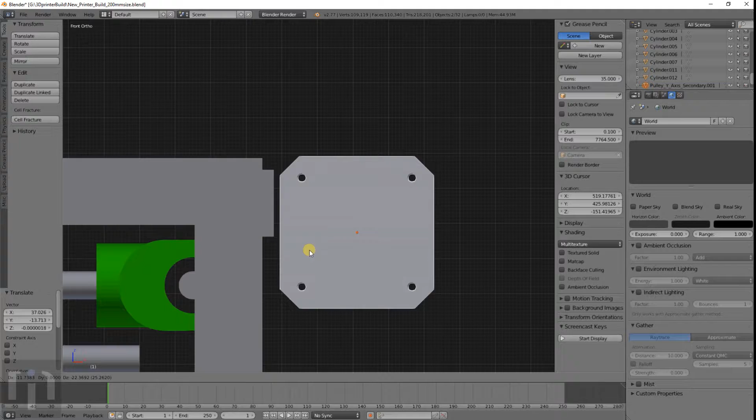So this one's going to be up here, kind of. Kind of make it even with this. Duplicate that. Just make it in line with this. Have this up a little bit.

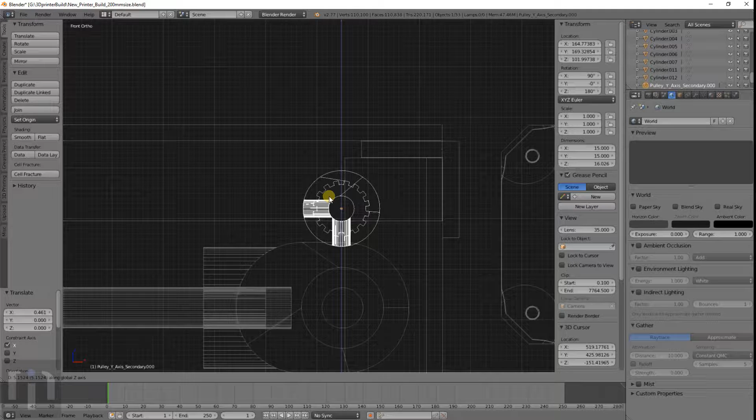Focus in on that. We want to have that have clearance for the belt and everything. And we actually want to have two of those, so I want to duplicate that.

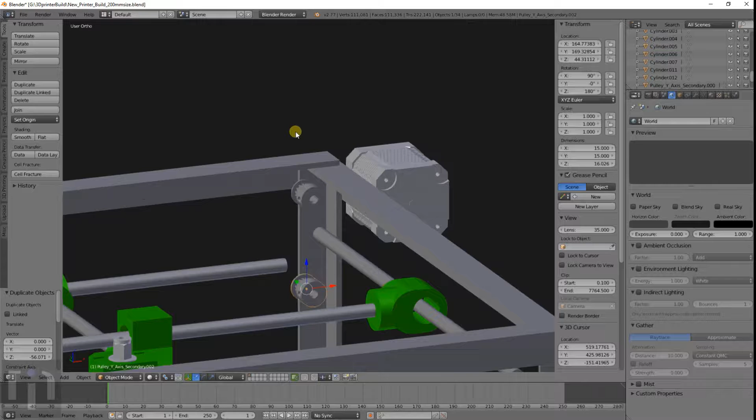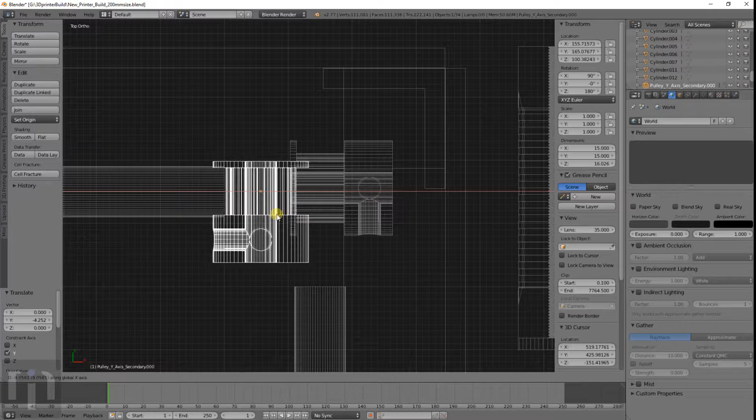Rotate Z. That'd probably be good there. Just move it out a little bit. So that it's kind of centered with that. Go ahead, make that there. That way it's lined up just right. I'll make this one centered with that one too. That looks good.

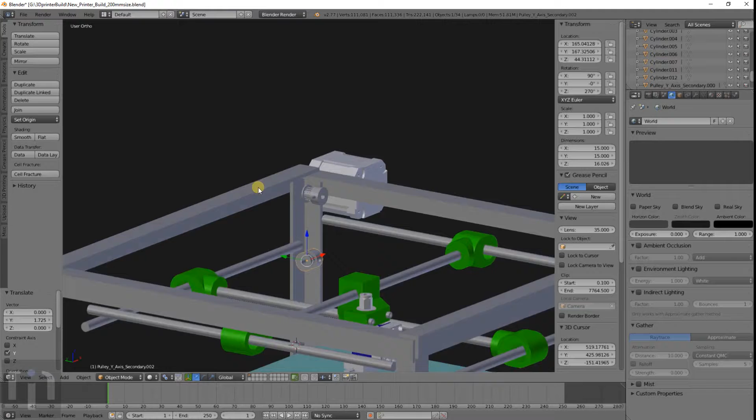So that was going to be there, that was going to be there. So now what we can do is kind of move the cursor over here and create a cube. Just kind of make a big one for now and put it in the color that we want for the 3D material. And size it down a little bit.

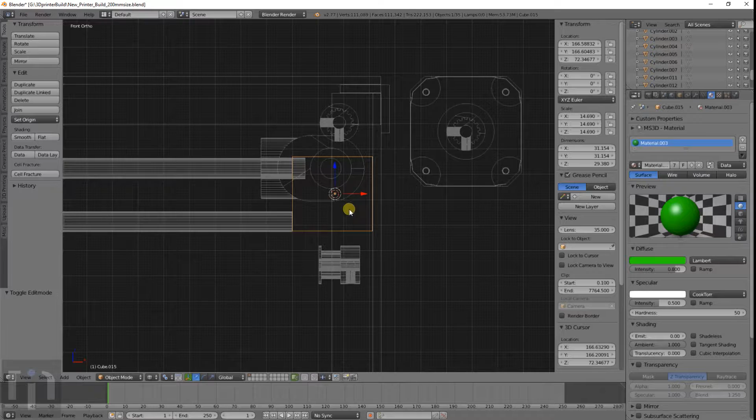I want to get this corner somewhat close there. Move this over to the edge there. Move this edge there. And as far as size goes, I'll kind of have it just slightly under that, so that we can make supports for them.

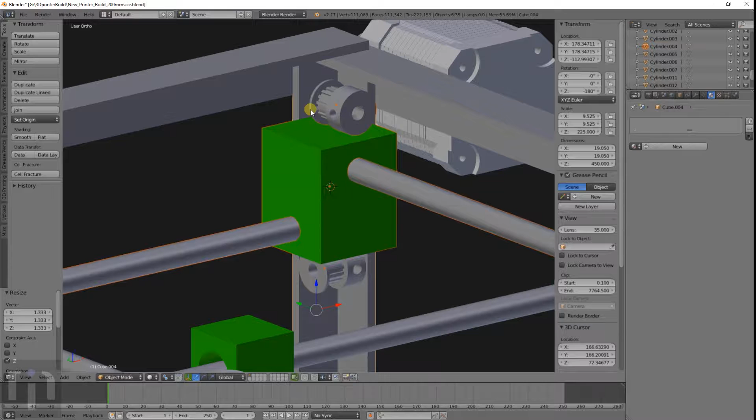Now what I'd like to do is just highlight all of these different things that we're going to be using in this area specifically, and hide everything else. So we got that there, got that kind of laid out how we want it to be.

So now I'm going to make, wish I could just duplicate that. 8 plus 10 is 18. Get 18 round, and 15 long. Just to make a mounting spot for the rod to sit on.

Make sure it's selected, duplicate that. Rotate Z 90, move this back over here. Join those two together. Boolean and add those two together. These are cylinder 8.

Apply. We can go ahead and delete the old ones there. We got that matched up there. Rotate that one around. Move it back a little bit there. So that looks good.

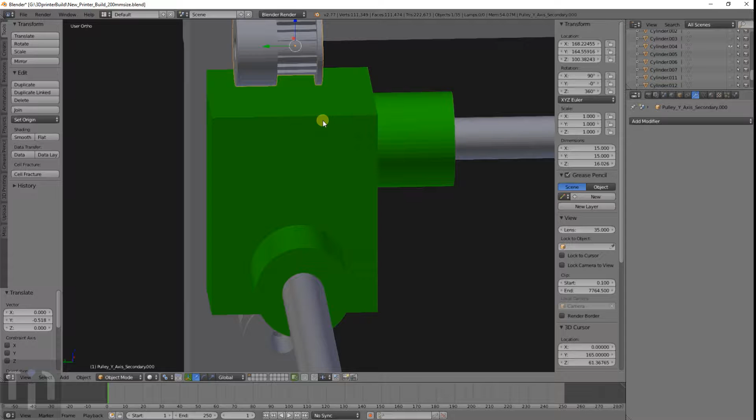So what we can do is add supports for this. Make a cube. It doesn't have to be super big. I found that if you make non-square edges, it usually gives a little bit better strengthening, things like that.

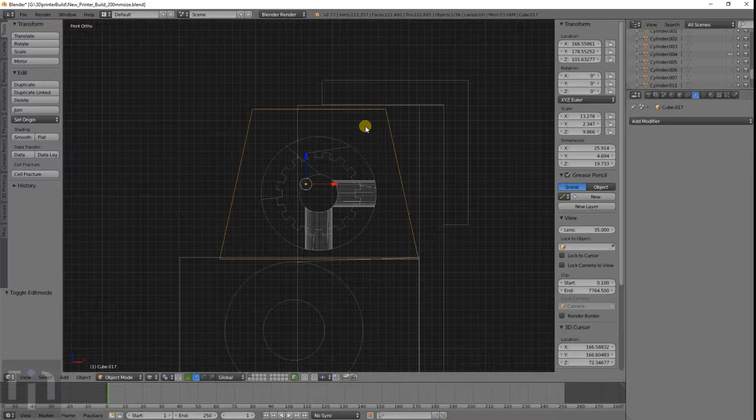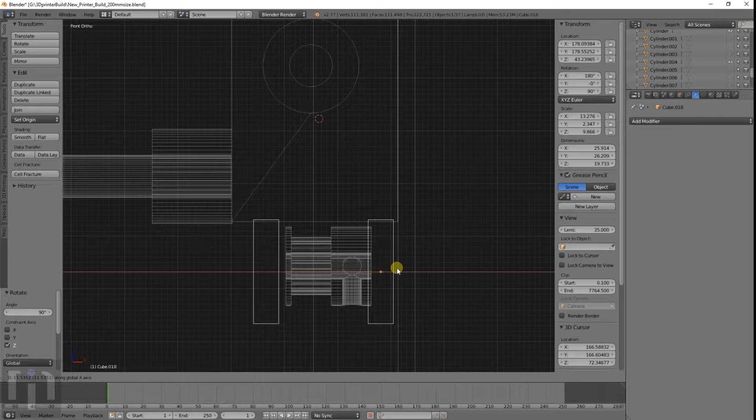Duplicate that, put that on the other side here. Put those two together. Duplicate it, rotate X 180, rotate Z 90. Put that here. Probably move that over just a little bit. Okay, so that looks good there.

Now we can join those two together. Boolean, union, that is cube 17.

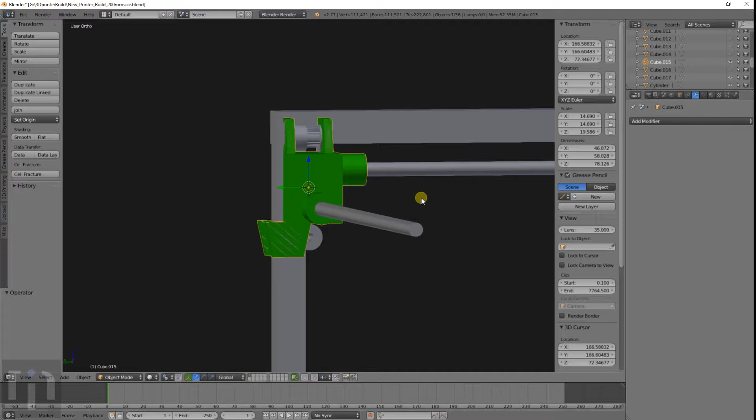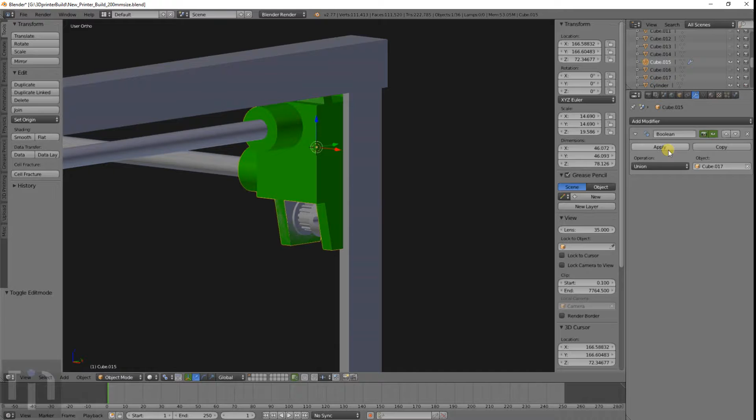Before too long, we're going to have to go through and name all these, because... Kind of messed that one up, didn't I? Okay, so let's go back to this. Just select all these, let's get these over to where they need to be. And go ahead and redo that. Kind of comical how often I make mistakes with these.

Alright, so we got that all set up. So what we need to do now, cursor is selected, make a cylinder, and this one you want to have bigger than the thing, so about 5.5 would be good, and you want to have it wide enough to go through the entire thing there.

Duplicate that. Duplicate that, join those together. And Boolean with both of these. That is cylinder 8. And that looks good.

So that's all set up in order to drive both of those. And so we just need to make the rods a little bit bigger. Let's do 8.25.

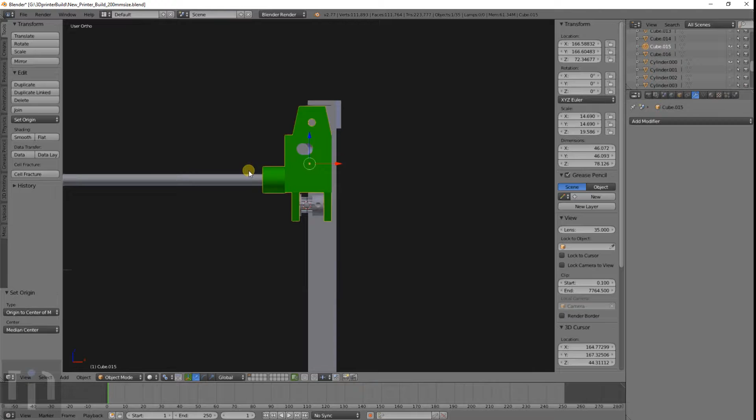So now this part is completely made, except for the mounting. We needed to have some holes to fit the bolts into to mount it to the frame.

So add a cylinder. You don't want to have these have too much tolerance. You want to kind of have the screw thread in as it goes. And we're going to be about 40, I'd say.

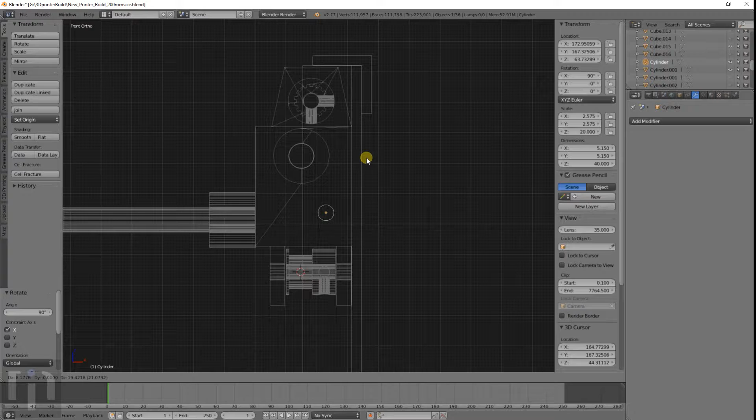And where'd it go? There it is. Excuse me. So we got that one there. Probably mount this with just 2. Looks like it'll go through.

And I'm going to add another cylinder here. This time it's going to be the nut. And that's going to be 6. And I'm going to make a couple of nuts and bolts here.

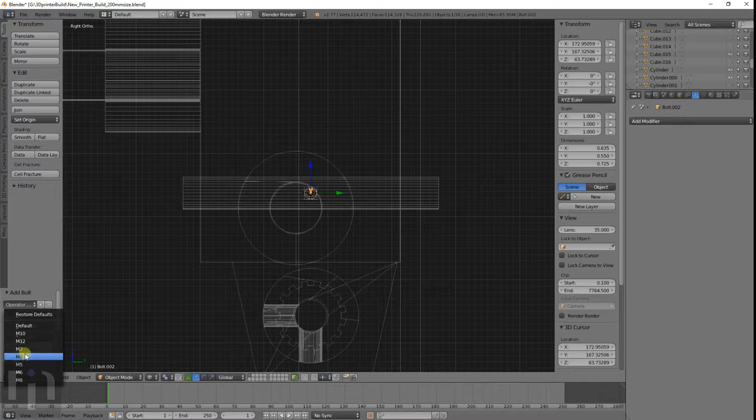M5 size, bolt Allen cap and thread length 20 again. I find 20 millimeters is a common size that I use. It's just the right size for me anyway.

So like that. So it's the angle iron and it goes on this side here. And so we're going to need to make the hole for the nut about that size there.

So go ahead and make another bolt. And it should be on M5 still. Just go to change this to nut and size it up. Rotate X. So we know the size that we need now.

So now we can add a cylinder. I did, I don't know, there might be another one there. I'll have to see in a little bit.

Actually, rotate 30 degrees, make the same size dimensions, so that we know we have it right. So we got that. We can actually go ahead and delete that nut, we don't need that anymore. Yeah, I did make one already.

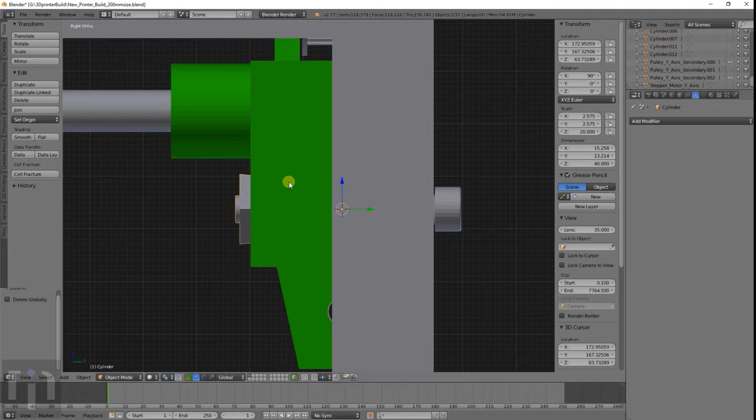Now I can duplicate that and rotate on Z. Wrong way. Oh wait, that was the right way.

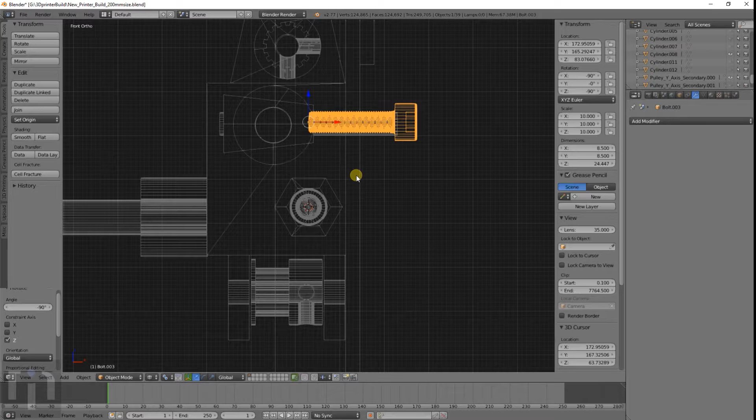Let's duplicate the nut up here to make sure that we got it the right length in. So that's the last thing you want to do, is get everything lined up and not have enough room for the nut to grip.

Can line that up with that there. Go ahead and delete these.

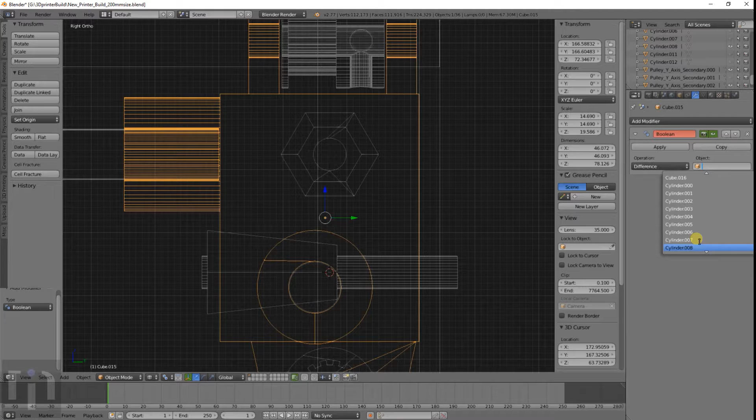Join these two together. That is cylinder 8 now. Cylinder 8, and that looks right. Apply, delete, and we have the mounting hole locations for it. That looks good.

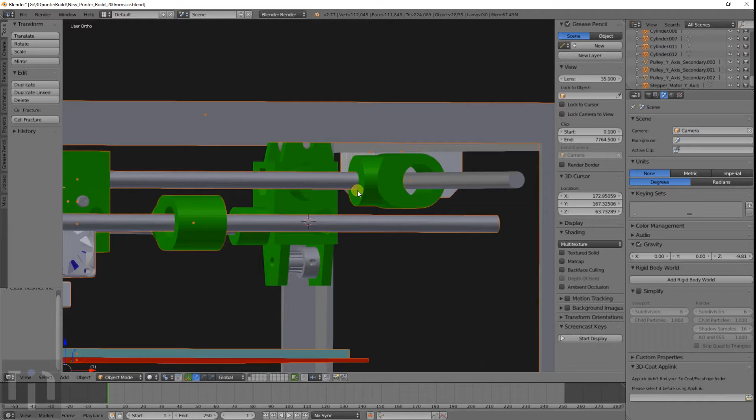Go ahead and unhide everything. Oh, I just realized something. Let's go ahead and undo that.

I have this nut lined up right with the angle iron, but I don't have this top one lined up right. This is moved over like that.

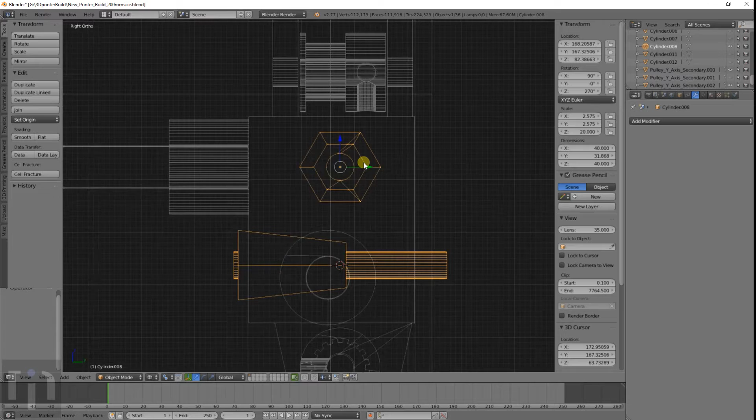So what I need to do is go to edit mode. Since these are both grouped together now, just move that over. Rotate it. Probably rotate that one too. I just rotated it initially to match it up with the size of the nut there.

That looks good, it's lined up. There's enough room. I'll move it over just a little bit.

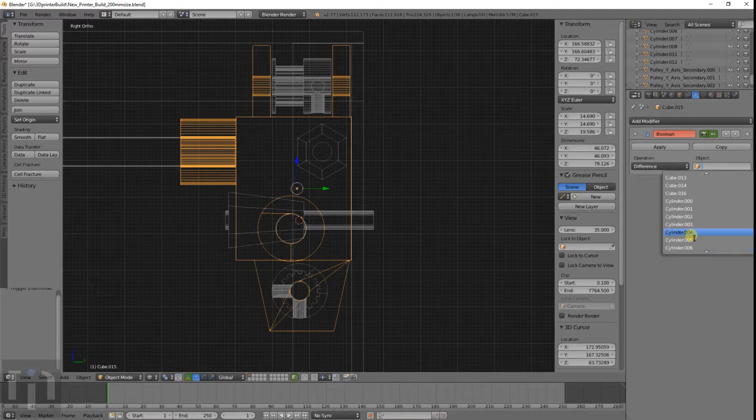Now I can do the Boolean. Cylinder 8. Apply. That's better, there we go. And then hide everything.

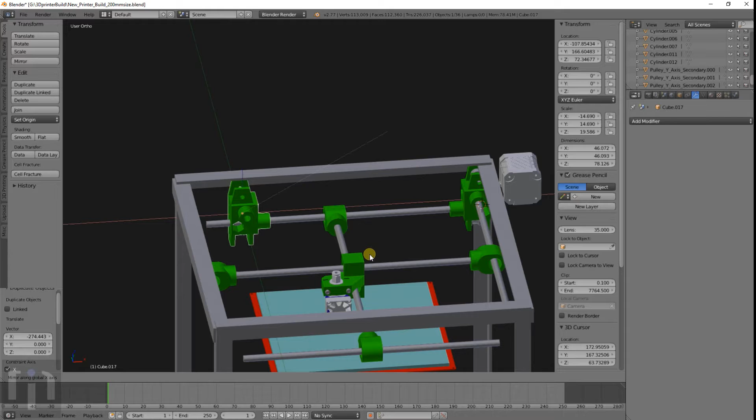So I can duplicate this and just mirror. We do the interactive mirror along the X, and that works. Just line that up good there.

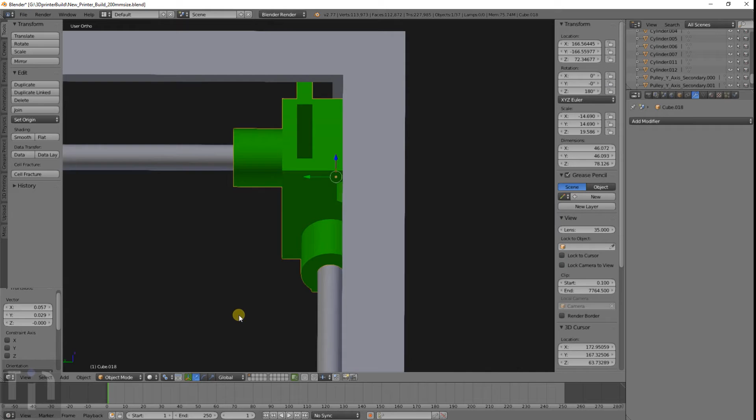You can actually duplicate that one, zoom it in and rotate it on Z, 180 degrees to turn it around. That should line up with the rods pretty well here. Focus on it so I can rotate around it. Yep, that worked good.

So we can just copy this one, duplicate that, rotate Z 180, line it up here.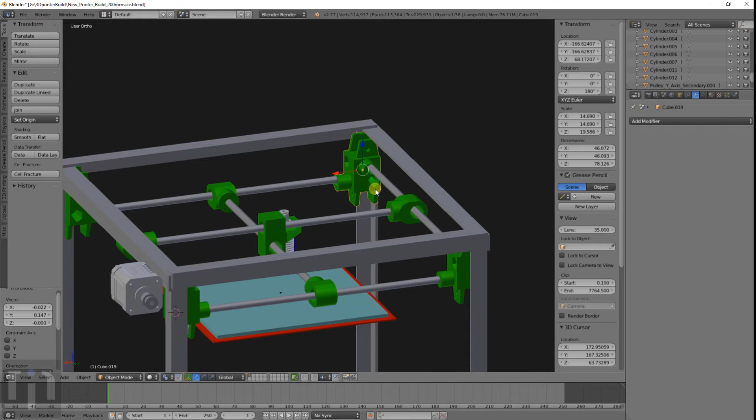Okay, so we got the 4 corners. These ones probably make them all lined up pretty well. So if that one's not lined up correctly this way... There we go. Okay, so those are all lined up good.

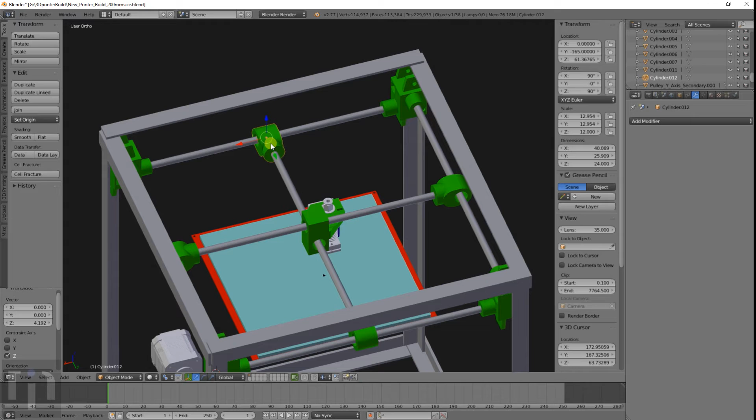Now we can edit these to add the thing for the belt, but first I want to make just kind of like a simulated belt. Zoom in on this pulley here. And move the cursor here. So what I want to do is make a simulated belt.

They're about 2 millimeters thick already, so you just need to make it the length of the end to end here, and they're about 6 millimeters wide. Okay, so that's lined up pretty good there.

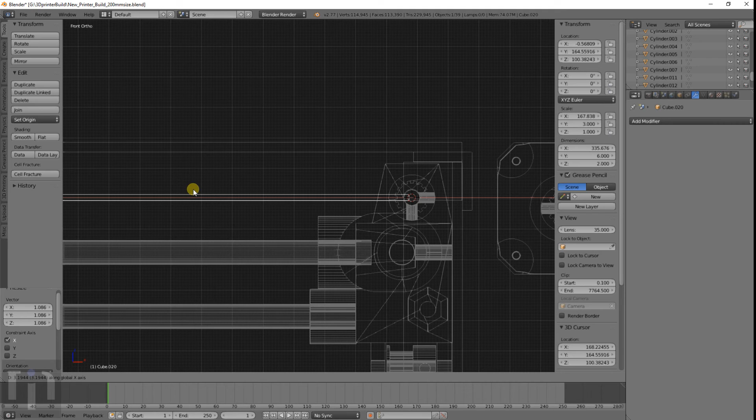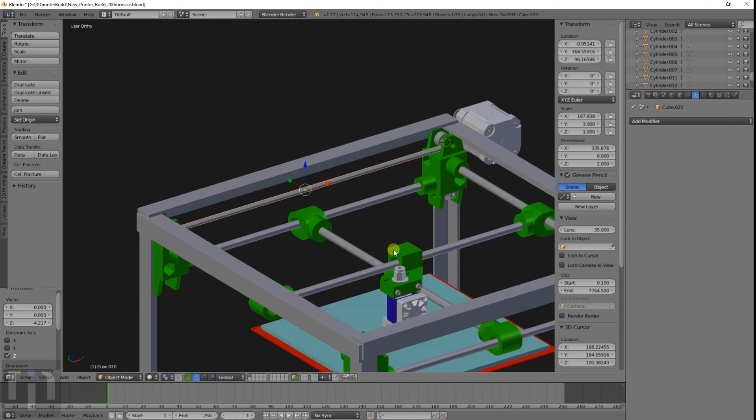So I'm not making the entire belt, I'm just making the part that matters here. Oh, I just realized I kind of got that backwards. What can we do about that?